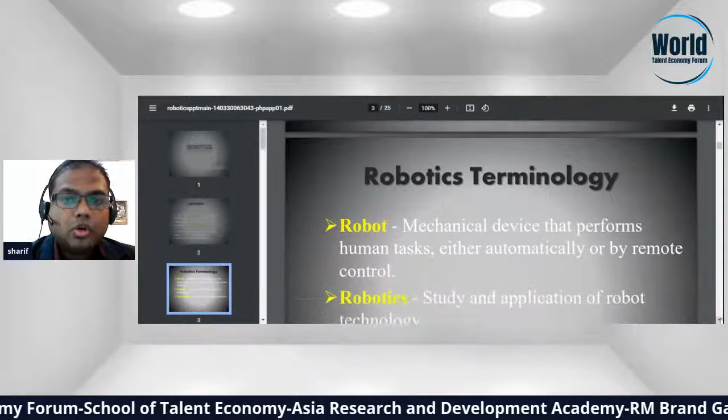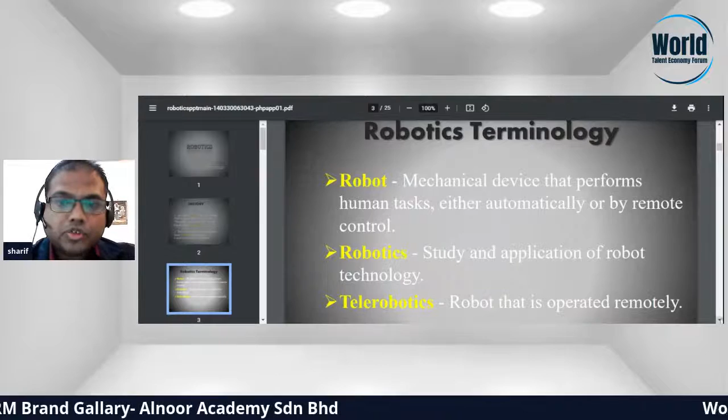Robotic terminology. Robot: a mechanical device that performs human tasks either automatically or by remote control. Robotics: the study and applications of robot technology. Telerobotics: a robot that is operated remotely.

Definition: what is the definition of a robot? A reprogrammable, multifunctional manipulator designed to move materials, parts, tools, or specialized devices through various programmed motions for the performance of a variety of tasks. Law of robots.

Asimov proposed three laws of robotics. Law 1: a robot may not injure a human being or, through inaction, allow a human being to come to harm. Law 2: a robot must obey orders given to it by human beings, except where such orders would conflict with the first law. Law 3: a robot must protect its own existence as long as such protection does not conflict with the first or second law.

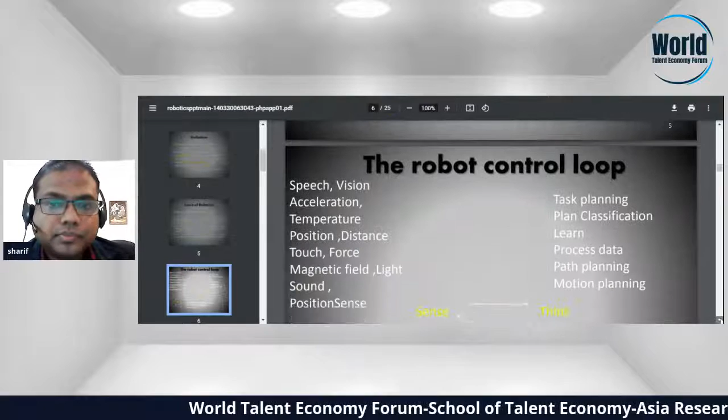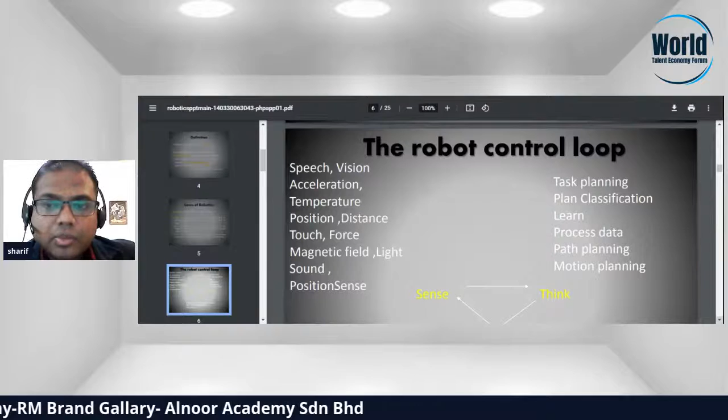The robot control loop: speech, vision, acceleration, temperature, position, distance, touch, force, magnetic field, light, sound, position sense. Task planning, classification, learning, processing data, path planning, motion planning. Sense, think, act. Output information: move, speech, text, visual, wheels, legs, arm, track.

Artificial intelligence is the intelligence exhibited by machines or software, and the branch of computer science that develops machines and software with intelligence. Major AI researchers and textbooks define the field as the study and design of intelligent agents, where an intelligent agent is a system that perceives its environment and takes actions that maximize its chances of success. John McCarthy, who coined the term in 1955, defined it as the science and engineering of making intelligent machines.

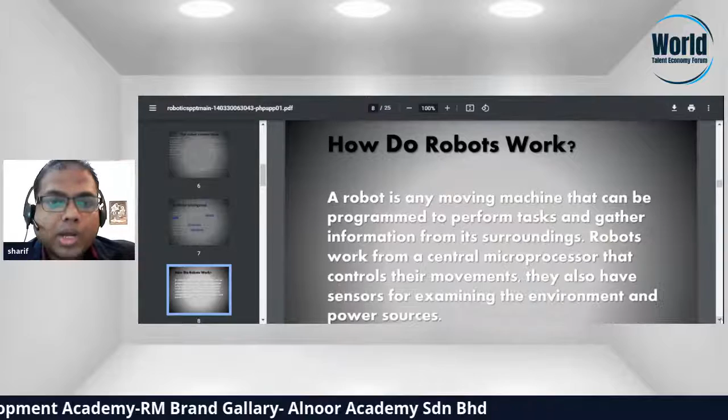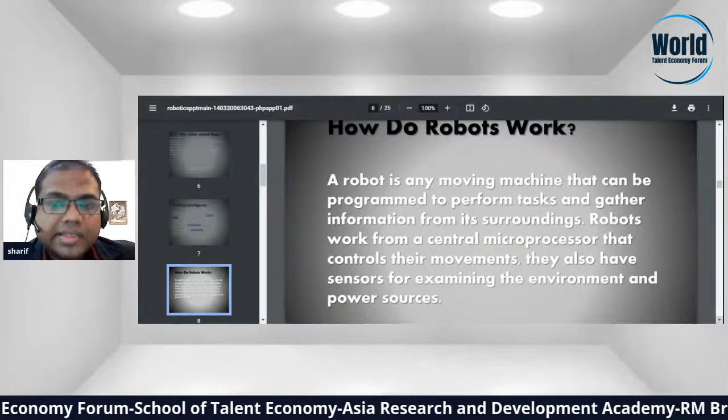How do robots work? A robot is any moving machine that can be programmed to perform tasks and gather information from its surroundings. Robots work from a central microprocessor that controls their movement. They also have sensors for examining the environment and a power source.

Type of robot: Industrial robot. Used for material handling, welding, inspection, improving productivity, and laboratory applications.

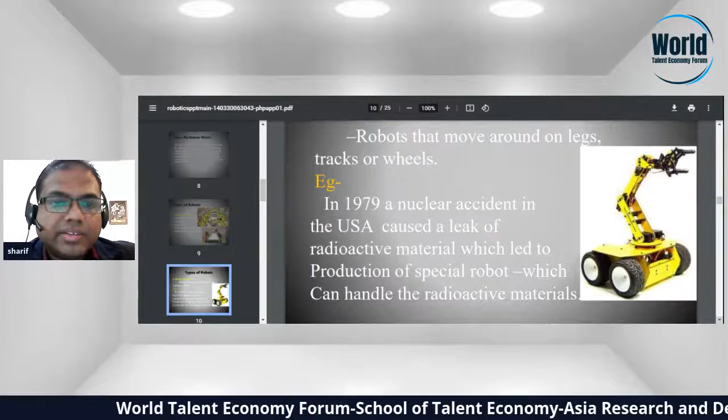Type of robot: Mobile robot. Robots that move around on legs, tracks, or wheels. Example: in 1979, a nuclear accident in the USA caused a leak of radioactive material, which led to the production of special robots that could handle radioactive material.

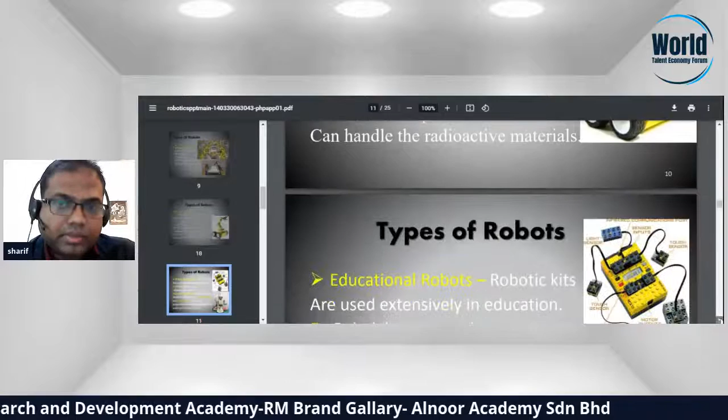Type of robot: Educational robot. Robot kits are used extensively in education. Examples include RoboLab, Lego, and Robocup Soccer.

Domestic robot: two types - those designed to perform household tasks, and modern toys which are programmed to do things like talking, walking, and dancing, etc.

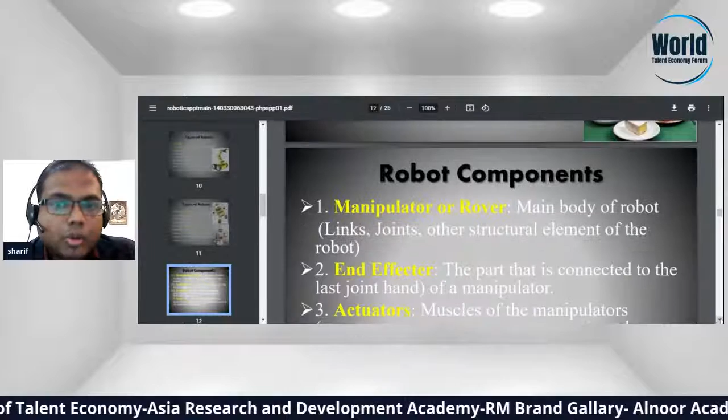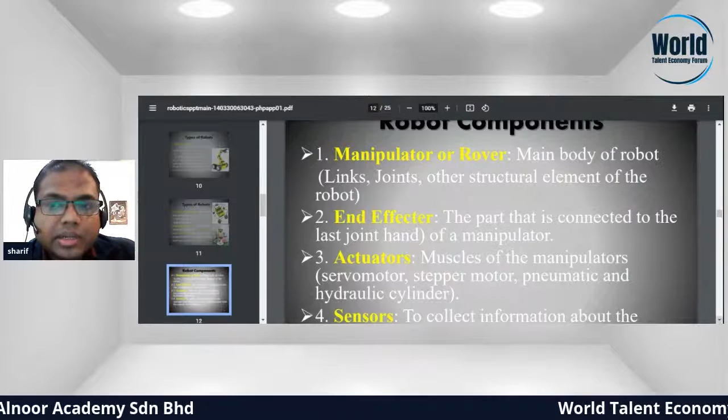Robot component: Manipulator or rover - the main body of the robot, consisting of links, joints, and other structural elements. End effector: the part that is connected to the last joint, the hand of a manipulator.

Actuators: the muscles of the manipulators, including servo motors, stepper motors, pneumatics, and hydraulic cylinders.

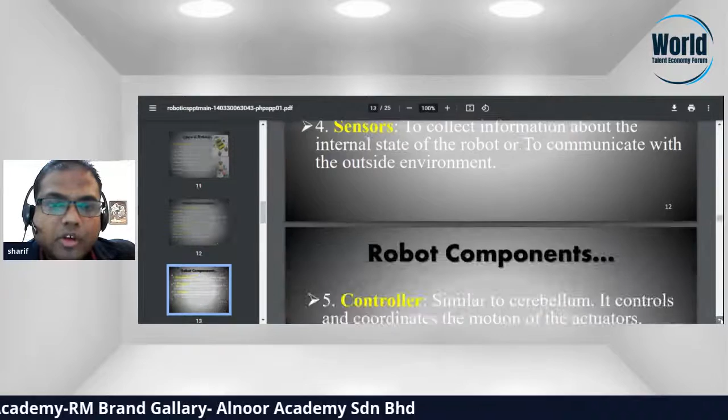Sensors collect information about the internal state of the robot or communicate with the outside environment. Robot component controllers: similar to cerebellum, they control and coordinate the motions of the actuators. Processor: the brain of the robot, it calculates the motions and velocity of the robot joints, etc.

Software: the operating system, robot software, and a collection of routines.

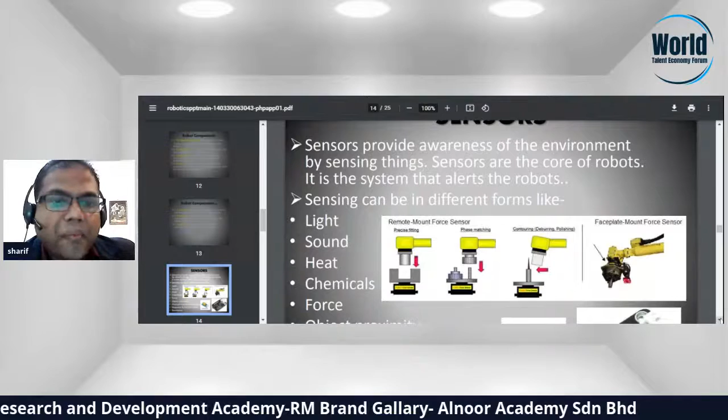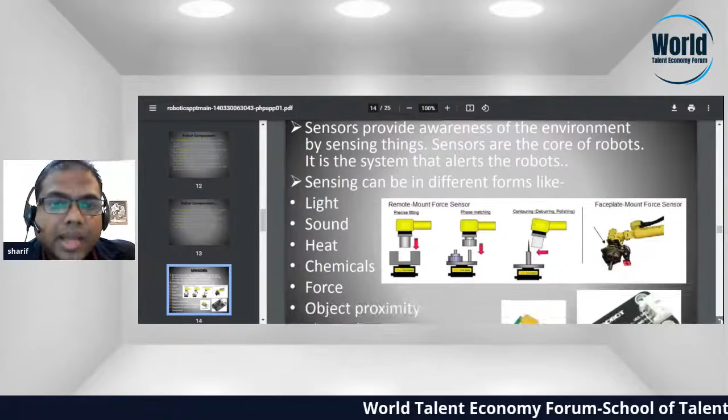Sensors provide awareness of the environment, the core of the robot - it is the system that alerts the robot. Sensors can be in different forms like light, sound, heat, chemical, force, object proximity, physical orientation or position, magnetic or electric field resistance.

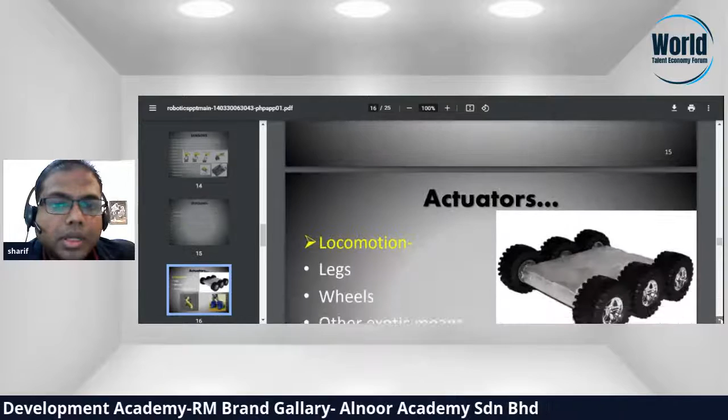Actuators: locomotion and manipulation. Actuators for locomotion include legs, wheels, and other exotic means.

Grippers may be very simple to pick up objects, or may be complex devices with a finger on the end of an arm, probably needing feedback to control grip force.

End effectors: in a robot, an end effector is the device at the end of the robotic arm designed to interact with the environment. An end effector may consist of a gripper or a tool. The gripper can have 2 fingers, 3 fingers, or even 5 fingers.

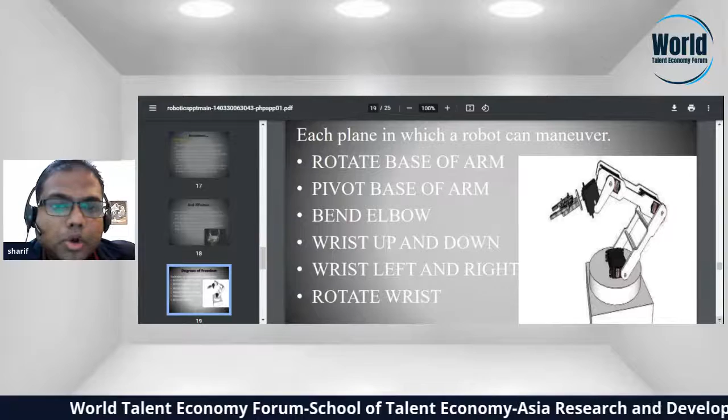Degree of freedom: each plane in which a robot can maneuver. This includes rotating the base of the arm, pivoting the base of the arm, bending the elbow, moving up and down, lifting the wrist up and down, and rotating the wrist. Now, the purpose of the robot.

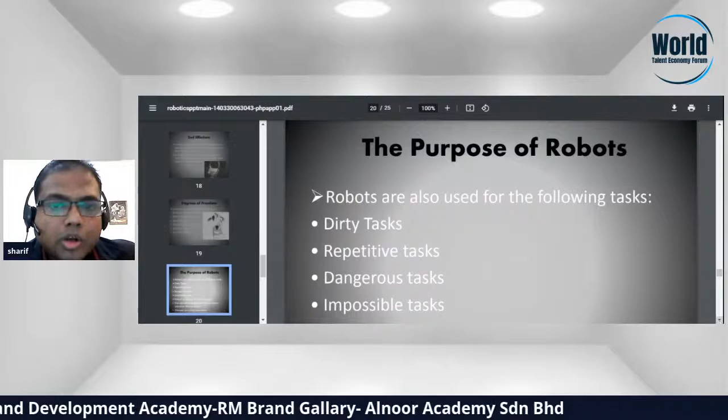Robots are also used for the following tasks: dirty tasks, repetitive tasks, dangerous tasks, and impossible tasks. Robots assisting the handicapped can operate equipment at higher precision than humans, and cheaper on a longer term basis.